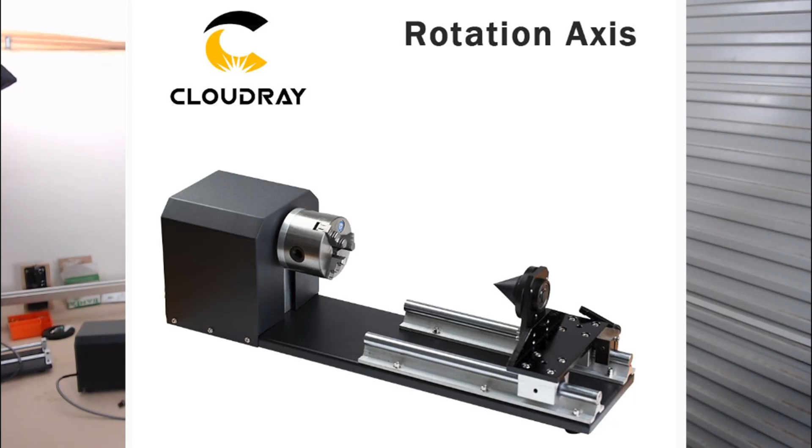We'll look at how to set up the Chuck Rotary Axis in the software, where to find the settings that need to be changed, such as the steps per revolution and the diameter of our workpiece. The circumference is also important because this will be determining the maximum height of our y-axis, so that it doesn't overwrite onto the previous cuts we've done.

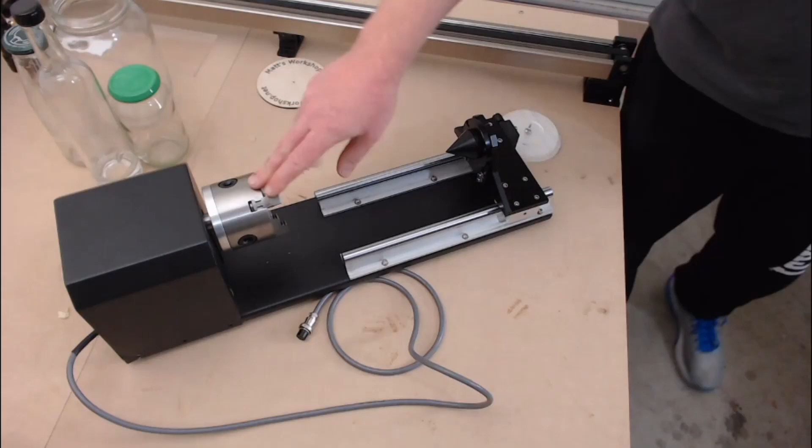So this is the Chuck Rotary Axis. We have jaws that hold the workpiece in place, and the way that you do that is simply put the piece in there and turn with the chuck key until it grips. Now this can be quite damaging on the material and can slip out quite easily.

So I've actually developed a method of holding pieces in place on the Chuck Rotary Axis, and I'll show you how I designed that later on.

So the controller that I'm using for this video with the Chuck Rotary Axis is the Ruida RDC6445. Now Ruida's software that comes with it is RDWorks, so I'll show you how to back up settings and make changes in the software using RDWorks, but I'll also show you how to do it in Lightburn.

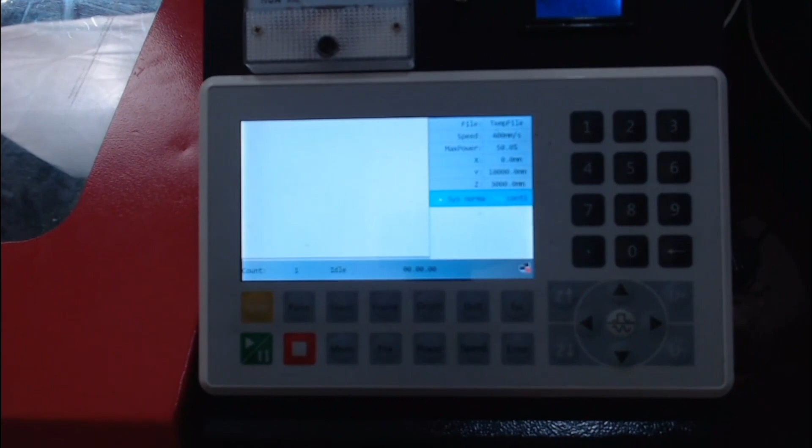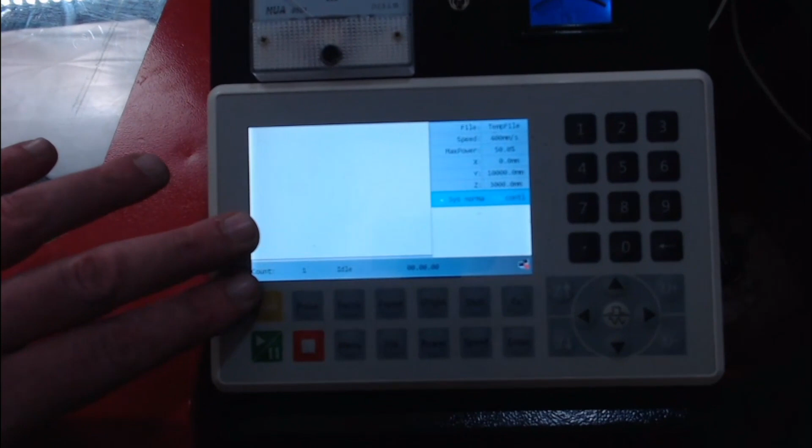If you have a different controller than this, like a Top Wisdom or Trocen controller, the settings that need to be changed are the same. You'll just need to find where they are on your controller and in your software. But if you do have one that is compatible with Lightburn, that makes it quite easy because Lightburn settings will work between several different controllers.

So this is RDWorks. RDWorks is the software that comes with the Ruida controllers, and it's also the software that can talk to the controllers and back up settings.

So before we do any rotary work, it's always a good idea before we change settings to have a backup file. So this is just how to back up the vendor and user settings.

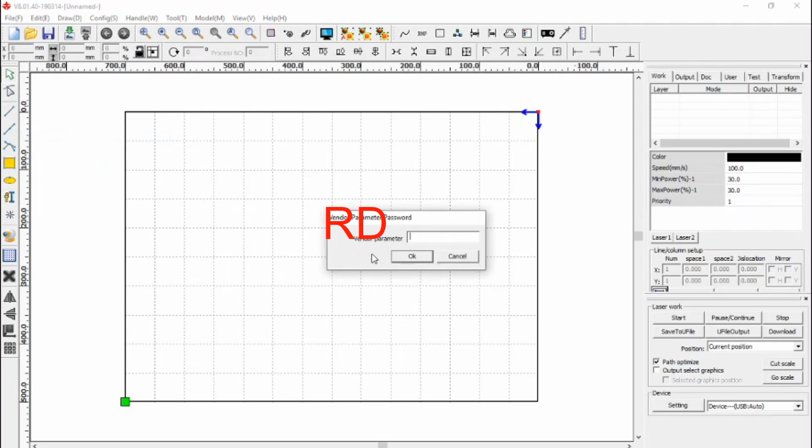So we go to vendor settings, put in the password RD8888, and first of all we read that information from the controller. Now what we want to do is save all the vendor settings as a backup file. I've called my file vendor backup, and we press save.

So that saves everything onto that file, so in case we change something and want to go back to it, we can always open that file and re-import those settings back to the software and then write it back to the controller.

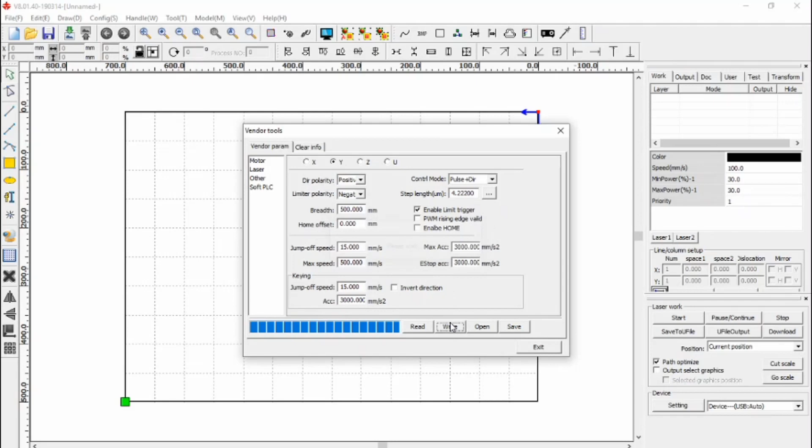Another tip while we're here is looking at the y-axis. In the last video I showed you how to turn off the enable home on reset for the y using the controller. Here in the vendor tools we can untick enable home and write that to the controller, and that does exactly the same thing.

So now that we've set that, the other option is the user settings. We want to back those up as well. So we just need to scroll down the side here. We read the information from the controller and press save. I've called this file user backup, and we'll save that file.

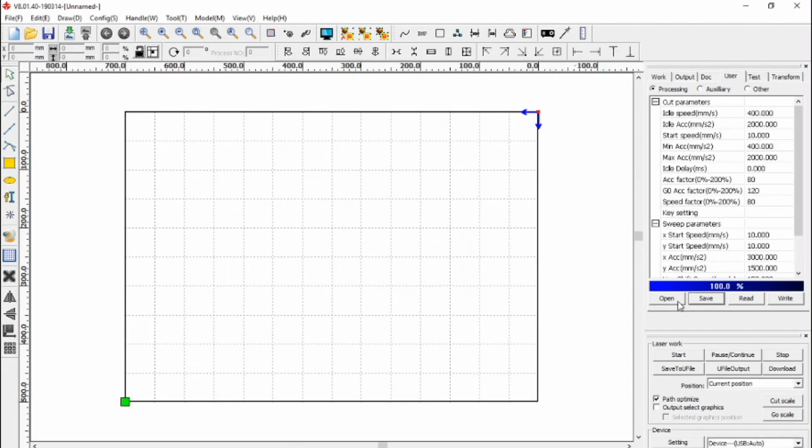So these parameters, if I make changes and forget what they are, I can always open that file and import them again. Okay, so to enable the rotary axis, what we need to do is go to the user tab, other, and scroll down to where it says rotating.

Circle pulse, which is also your steps per rotation, equals the gear ratio multiplied by the diameter ratio, which is then multiplied by the pulses per revolution.

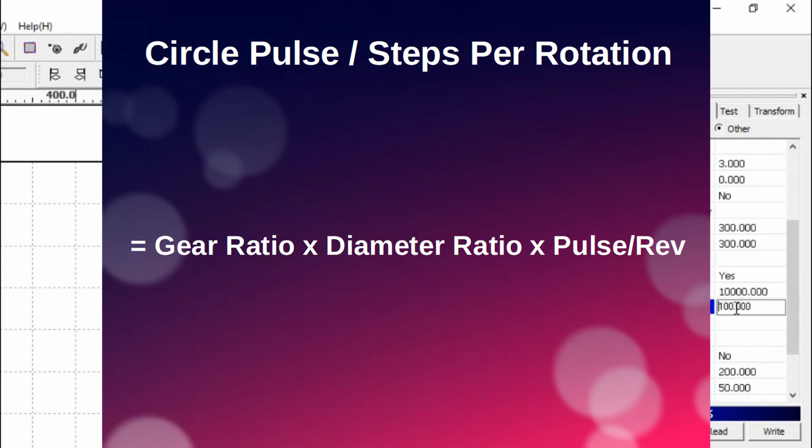So the gear ratio of Cloudray Laser's rotary axis is actually 2:1, and being a Chuck rotary, the diameter ratio is actually 1:1. So we've got a gear ratio of 2, a diameter ratio of 1.

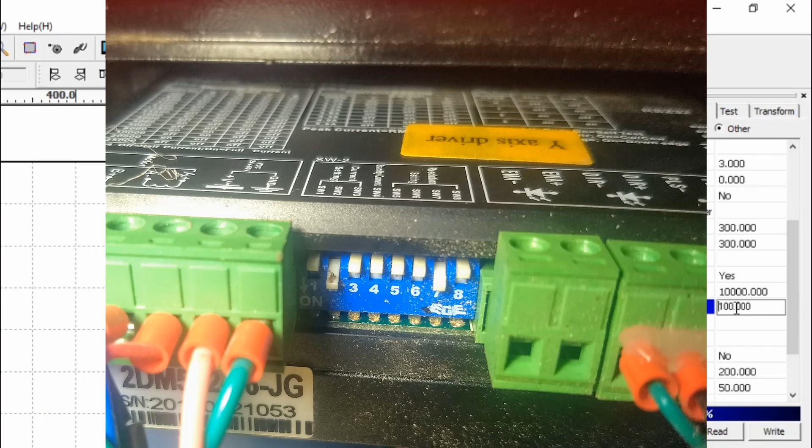We now need to find the pulses per revolution. Now that can be found on the y-axis driver, and we look at the dip switches on the side here, switches 5 to 8. We want to look at the settings of those and then refer that to this chart that's printed on the y-axis driver.

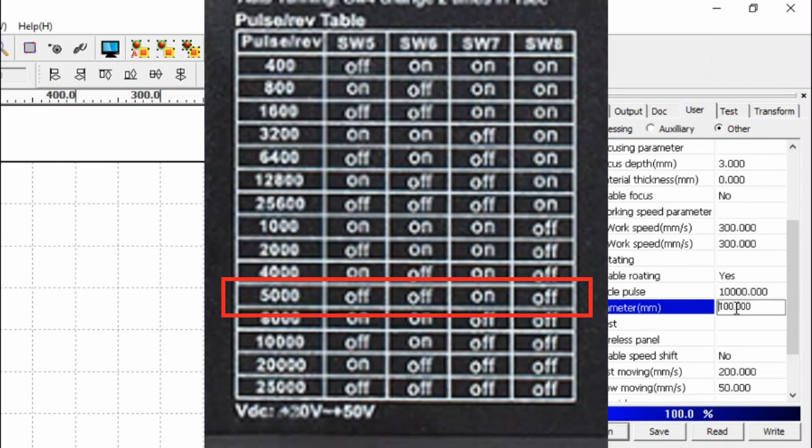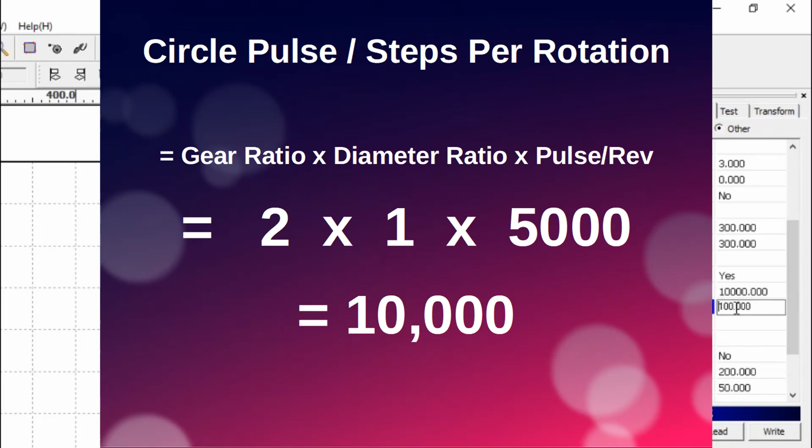If this is not printed on your driver, you should be able to find this chart in your user manual for your axis driver. So we can see here for my driver that it has a pulse revolution of 5,000. Now using these figures we can calculate the equation: 2 times 1 times 5,000 equals 10,000.

That's our circle pulse, or steps per rotation. The only other thing we need here is our diameter, and the diameter will be the diameter of the chuck, which is 80 millimeters. Once you have these figures all entered in, then it's possible now to write that to the board.

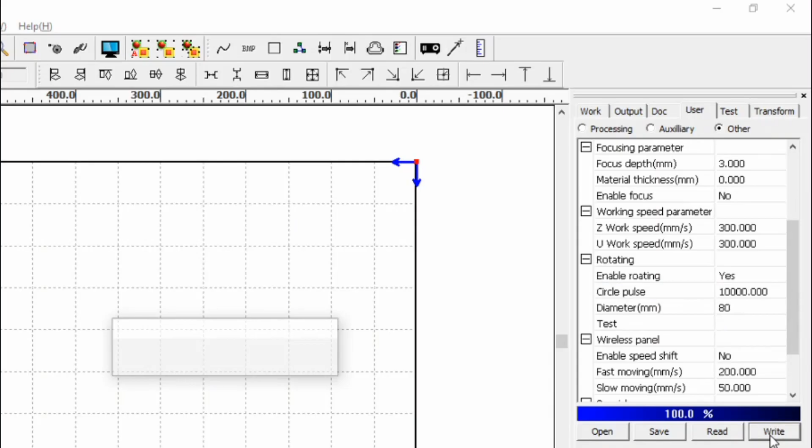So we've checked our diameter, and we have a chuck diameter of 80 millimeters. We've also set our circle pulse, so we're going to do a test. To do this, I'm just going to pop some tape here as a mark, and on the other side we'll pop another piece of tape as the lining up mark.

Now what we want to do is use this option underneath here that says test, and this test will run at 50 millimeters a second. You can change it if you want to. We're going to see whether the 10,000 steps per circle pulse is actually one full revolution. So we press test and say OK, and the rotary will go around and it should line back up perfectly, which it does.

Just as an example, I want to show you here, if we had our steps out, say at 9,000, and we wrote that back to the board and did that same test again, we should see that the mark stops short. That's a way you can see whether you need to adjust it slightly. If it was out by a few millimeters, you could adjust your circle pulse so that it met up to where you want. So we've got it back where it was, and we'll pop it back at 10,000, making sure we write it back to the board and then test.

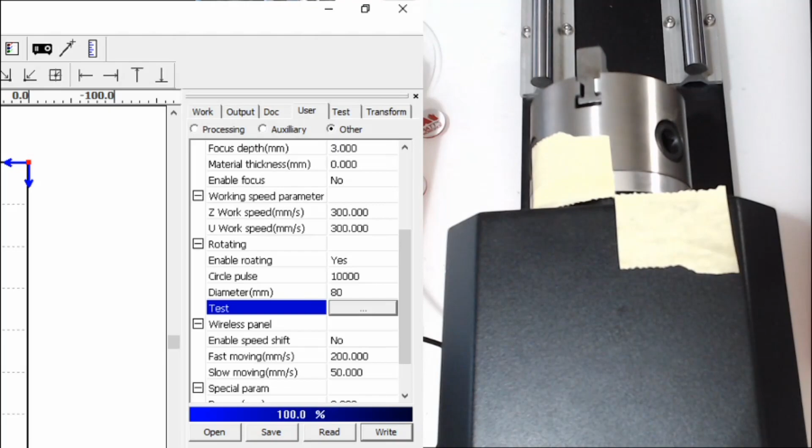Another important setting to change when using a rotary attachment on your laser machine is the idle speed. On the Ruida controllers, the idle speed is the speed the axis moves between cuts, and also the speed at which it returns to its point of origin when the job is completed, or if you finish by pressing stop. If you've got it set at 400, it can cause quite a lot of inertia, and the piece may fly out of the rotary attachment, which you don't want. So when I'm doing rotary work, I like to set this down to about 50 millimeters a second.

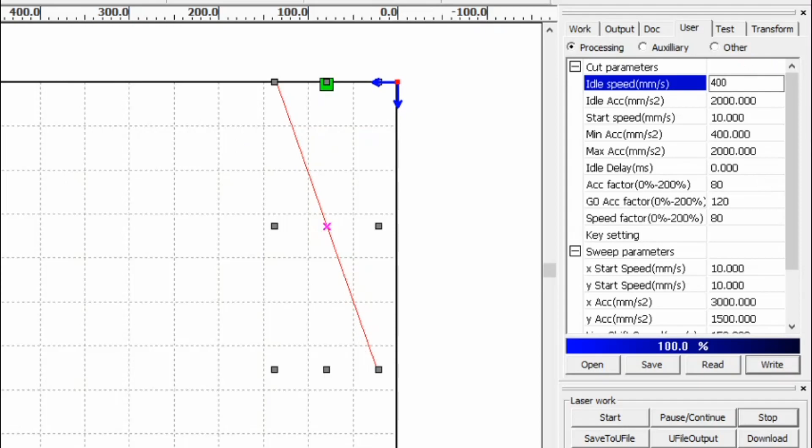I'm going to quickly demonstrate. I've got this line here that's 20 millimeters a second, and I still left my return speed at 400. So using a chuck rotary attachment, if I start the job at 20 millimeters a second, at the end of the job it will return at 400.

So if we reduce this now to say 50 millimeters a second and write that back to the controller board, if we start this job now, you'll notice that if I press stop halfway through the job or at the end of the job, it will return at a more controlled speed.

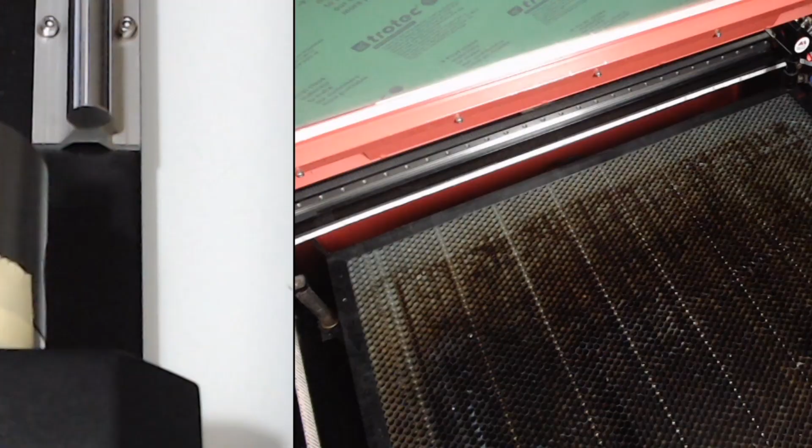Now what we need to do is put the rotary inside the machine. Following the instructions from the previous video on connecting up the aviation plug down here, we've got that all connected, and now we need to lower the bed far enough so that the rotary will fit in.

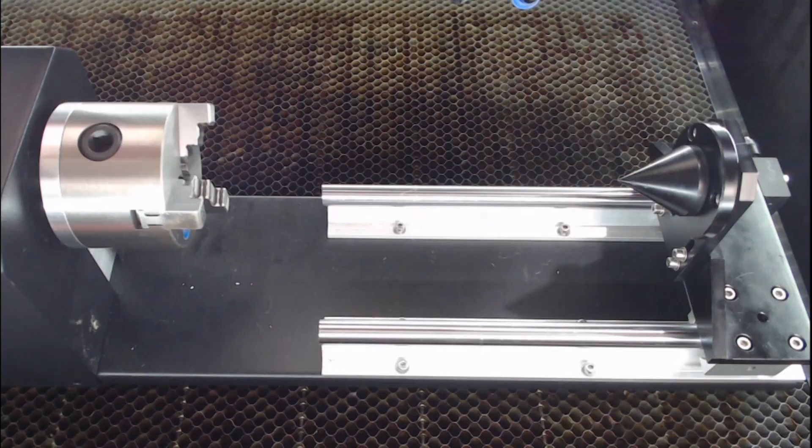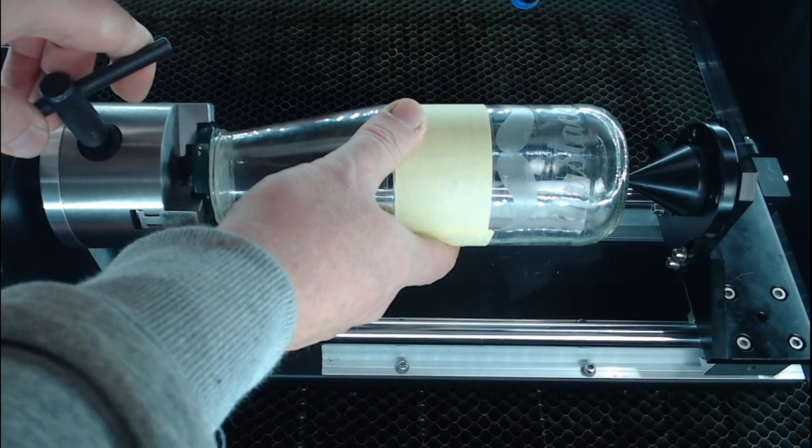Once you've got it positioned, this is now the y-axis, so the y-axis rail is free moving, it's not being held by the stepper drivers. So we can just move it to where we want, and then if we open up the chuck jaws, we can position our piece. There are other methods of positioning and holding material on the chuck. The chuck is quite aggressive on the material, so it can actually cause it to break, mark it, etc. So just move the tailpiece up and lock it into place as well.

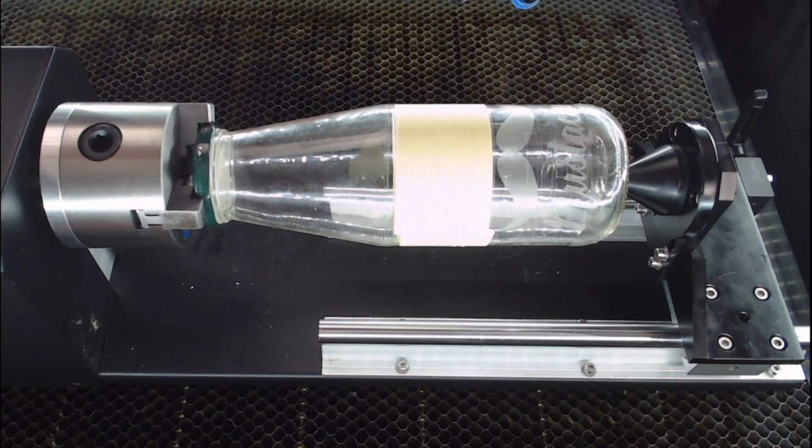Now what we need to do is find our focus point, so we can focus that on the part of the job we want to engrave or cut. So I've focused that there, that's good. Now what we also need to do is find the center line or the center axis.

On this chuck I've marked the center axis, so we can move our x-axis over there and position the rail until it's on that and we know we're centered. Then bring it back to where we want and press origin.

Now when you're working with the rotary, we need to know the diameter of the workpiece, and that gives us the circumference, which works out to our maximum height or length of our job. This is a 77 millimeter diameter bottle, so we're going to have a look at the software.

If our diameter of the bottle is 77 millimeters, then we go to user, down to the diameter, and put in 77 millimeters. Once you work out the circumference for the bottle, then you use this as your maximum height. So the bottle at 77 millimeters has a circumference of 241.9 millimeters. We just put that in there.

I'm actually going to cut this one on the laser. Just remember before you start that you need to write that setting back to the controller board.

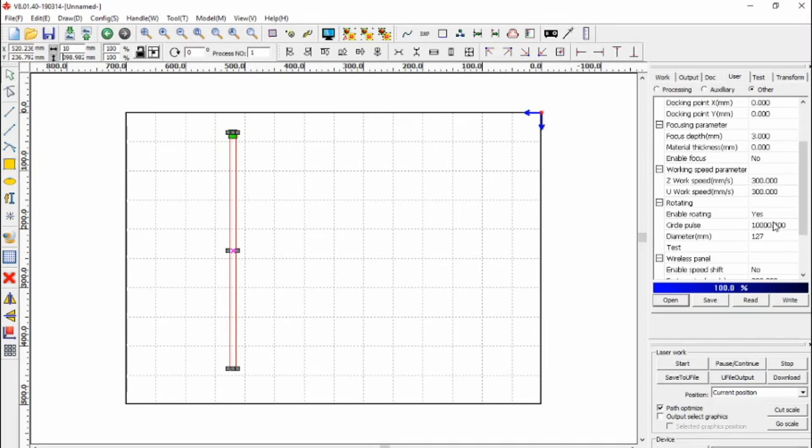So I put that 398 in here just so that we adjust our rectangle. This is the top of the y-axis, the circumference of the jar back to the top again of the y-axis and returning. So let's just run this test and see how accurate we are. But before we do, we need to make sure that we write this 127 millimeters to the control board.

So what I've done for this test is I've just put the tape on the jar and marked it. I'm not actually going to cut this, but we can watch the red dot go round back to that location and then return back again. So I've got the laser off and we're just going to start this now.

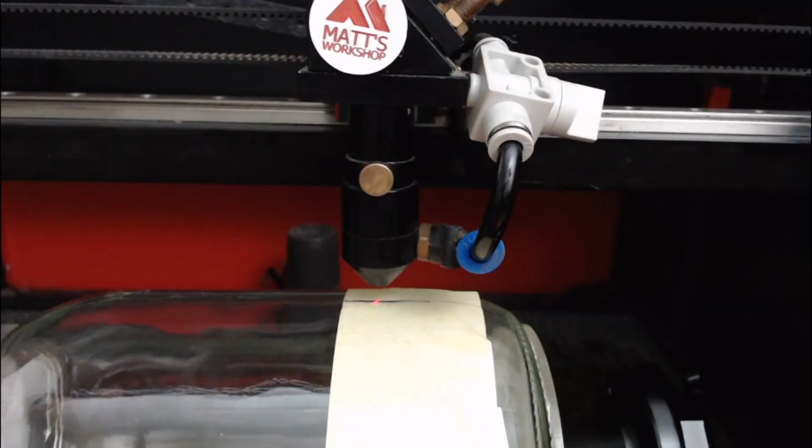So as we can see, we went all the way around the jar back to that point and then around back to the origin again. So we've been able to set it up successfully by entering in the diameter in the settings as well as the circumference as our maximum height.

We're going to have a look now where we can find these settings in Lightburn. First of all, we can have a look at the machine settings. So under Edit, go down to Machine Settings, and this will load the user settings from the machine.

One of the settings we changed previously was the idle speed, which can be changed here, so we could set that to 50 millimeters a second. The other thing we can look at here is Enable Rotary. We can turn it on and set the value in there, which was 10,000. And the diameter for the test piece was 80 millimeters. We can write that to the controller, and when you're finished, click on OK.

The next thing we look at is Tools and Rotary Setup. Now we've enabled the rotary, so it'll come up here as a tick box and you choose what type of rotary attachment you have. In this case we're using the Chuck version, and we have steps per rotation which we've set at 10,000 steps per rotation, and the object diameter of 80.

The good thing with Lightburn is that if we change this to 127 diameter, it automatically calculates our circumference for us. So if we had a piece that was 127 in diameter, we know that our maximum height will be 398 millimeters. And now we click on OK.

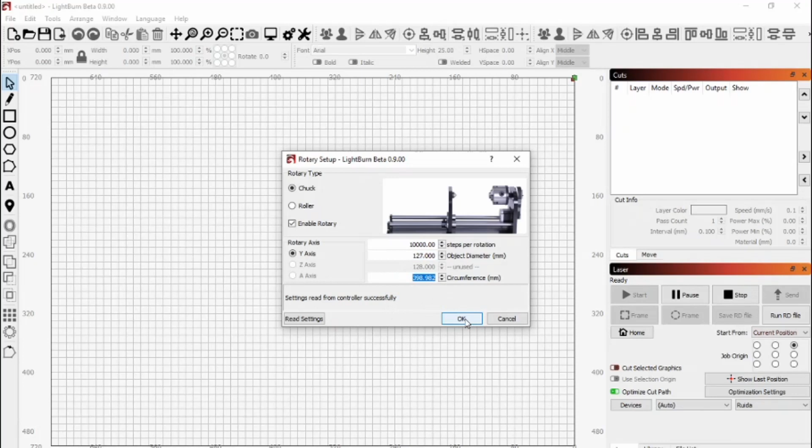There is another option which you can turn on down here, and that's Enable Rotary option, where you can turn it on and off. Where you get that is in the settings, and we go to here where it says Rotary Enable on main window. When we click on OK, we'll see that we have this switch box here which we can turn on and off for the rotary attachment.

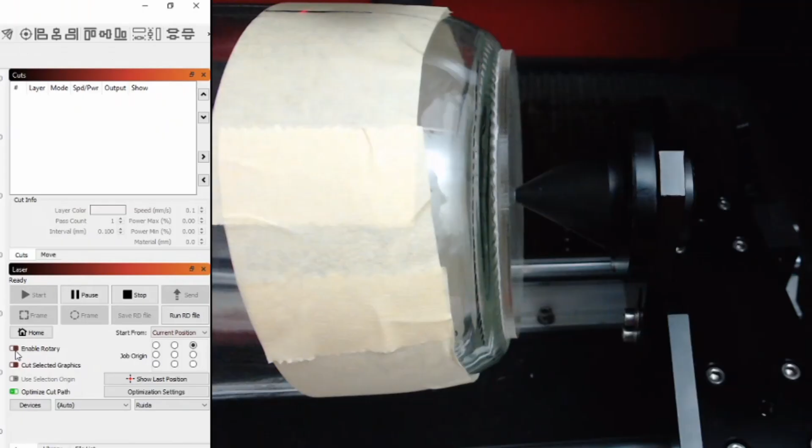The thing I notice is that the Chuck rotary attachment has this cone or point that points into the bottom part of the workpiece. So the cone is not very accurate at holding the workpiece. You can put a mark on your job to get the absolute center, but on very hard objects it doesn't pierce and doesn't hold it very securely. On the other end we have the Chuck, and it has teeth, so if they put pressure on glass, you could crack it.

So I've developed this little holder which has a soft padding on the inside to help it hold together and has got a lot of friction there.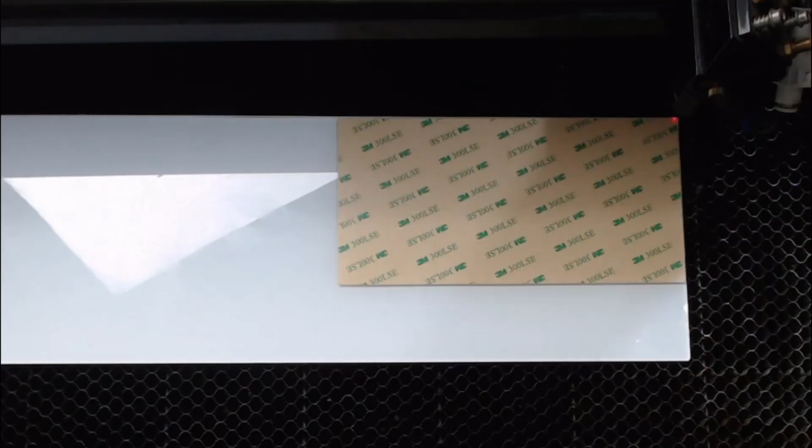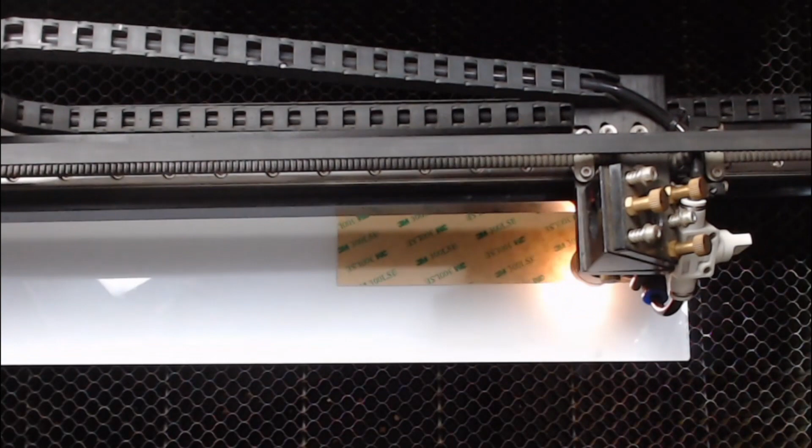The first thing I did was draw up some circles in Lightburn. These are 100 millimeters in diameter with a 4.75 millimeter internal hole. These will form the face and the base plate for my rotary holder, cut out of 3 millimeter acrylic with some 3M adhesive put on it. The next part we need is a 50 millimeter disc with a 10 millimeter internal hole, cut from the same material.

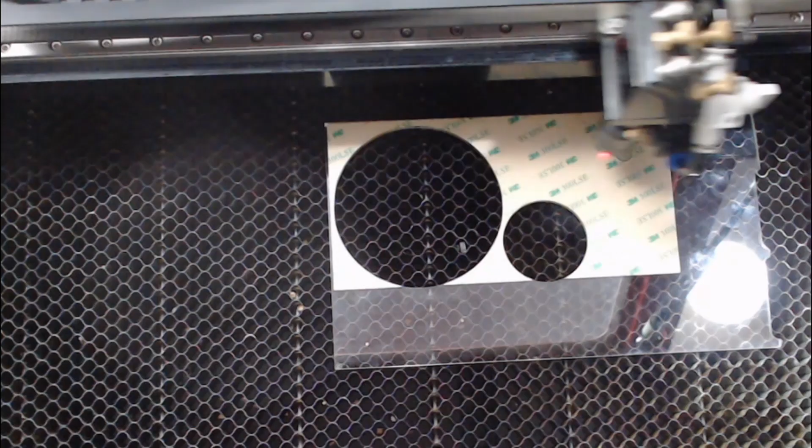So get this packing type material, and peel off the 3M adhesive. We want to stretch it out as far as we can, push down, do this for both pieces, and then trim the excess off. You can use this foam, or you can use rubber, anything that's got a bit of friction and grip to it. Now this is the other piece that we cut out.

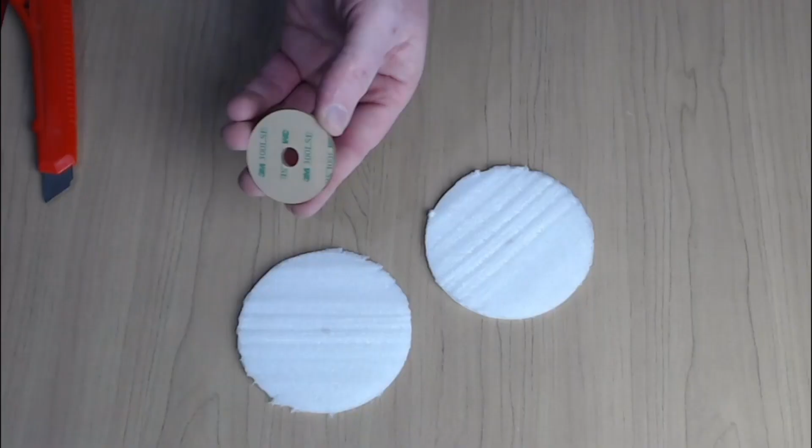This piece here is what ends up being held in by the chuck. You can make this out of a thicker material if you want to. So grab a screw, poke it through. Now it's a tight fit, designed that way so it doesn't slip.

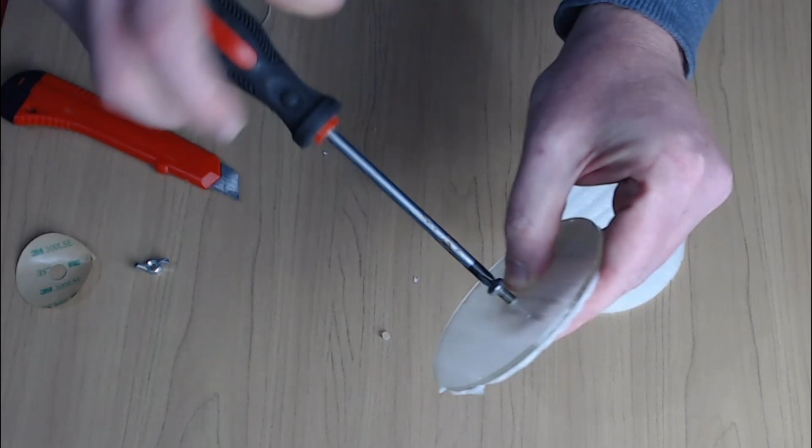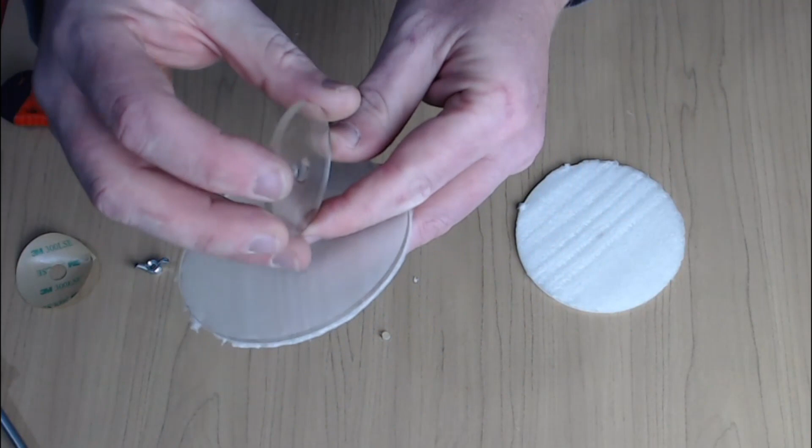You just adjust your center hole to the size screw you're using, and the other piece we cut out before with the adhesive backing goes around the outside edge of that screw. Again, a nice central fit so that we know it's all dead center.

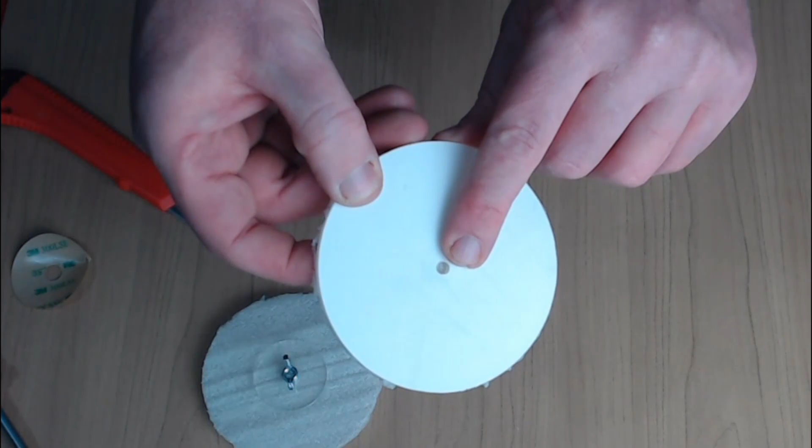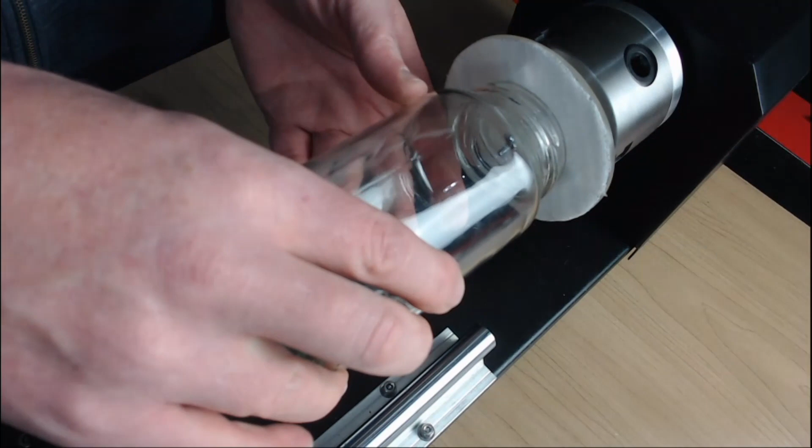So let's go and assemble it up. I've got a jar here which I measured up to that piece, so it fits nicely on that edge, and this piece gets wedged into or held in place by the chuck. So tighten the chuck down. The wing nut ends up on the inside of our workpiece, and then we pop this on here. The backing plate goes at the back.

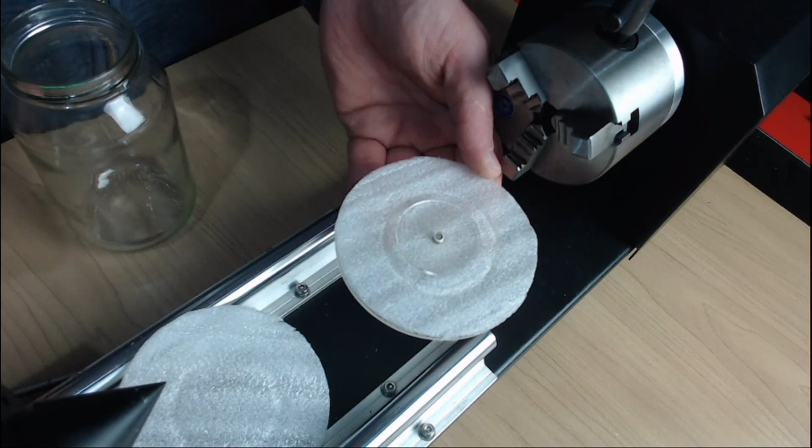Line it up with the center hole, and then lock it in place. And now we have it nice and secure inside between those two friction pads. The good thing about these is that if you didn't want the big one on there, you wanted a smaller one, any size, you just cut one to suit the piece of material or the circumference of the inside of the work that you want. That's my design for that one.

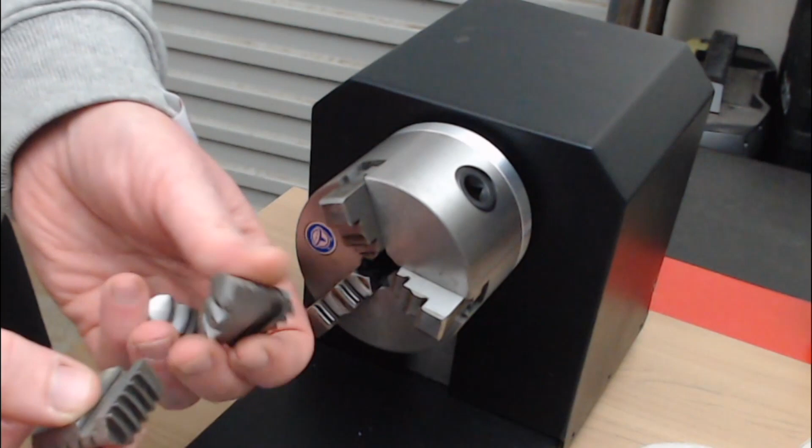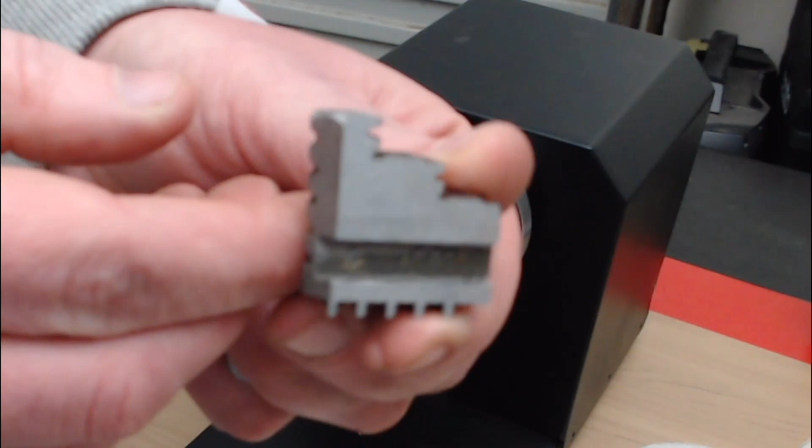Okay, so the last thing I want to show you is the teeth that go in the chuck. If you have a look at the set of teeth, these ones clamp inwards and these ones go the other way and will clamp outwards. They're all numbered. If you look on the inside, you'll see it's got some numbers on there, and this one has a number 2 at the beginning. We have a number 1, so 1, 2, and this will be number 3. These are specifically geared for the inside of the chuck.

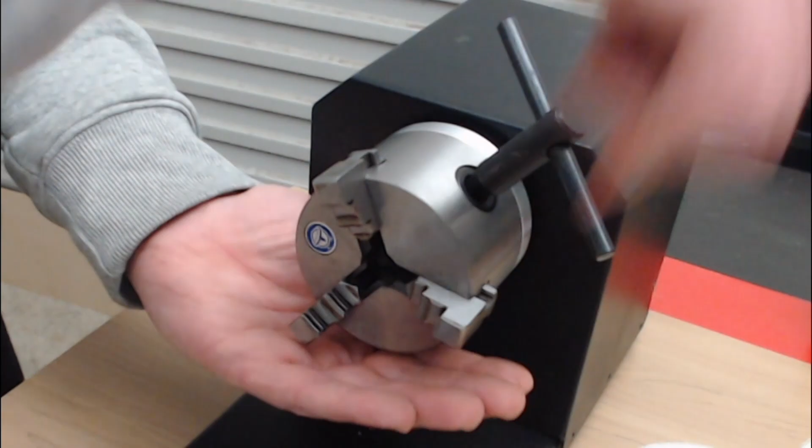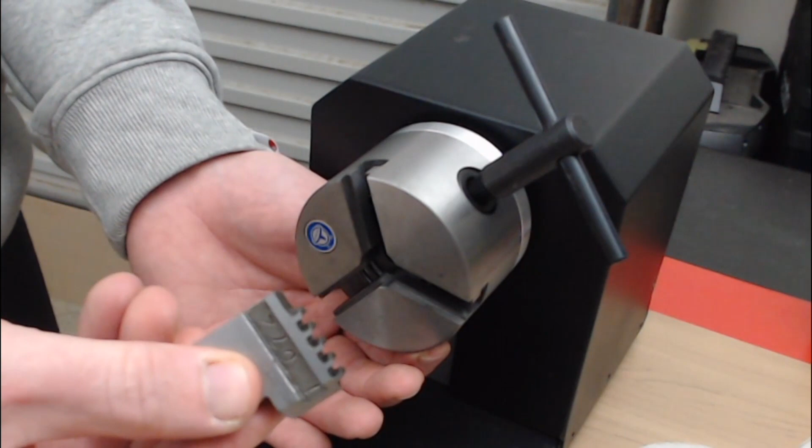So to remove the other ones, we just rotate them outwards. Pull the first one out, and it's a number 2, and this one here is number 3, and number 1 will be the last one that is released. Now number 1 needs to be the first one that goes in, so this is number 1. If we turn the chuck around so that's up at the top so we can see it, I'm going to zoom the camera in and we're going to have a look at that.

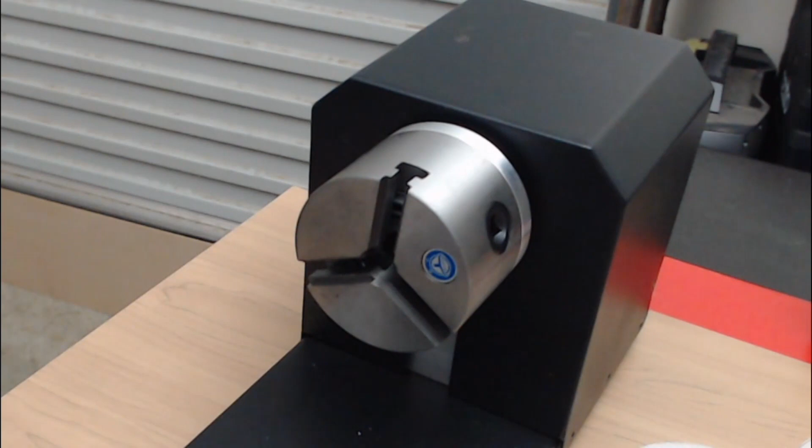So we can see we have a number 1, a 3, and a 2. That's the order they need to be assembled.

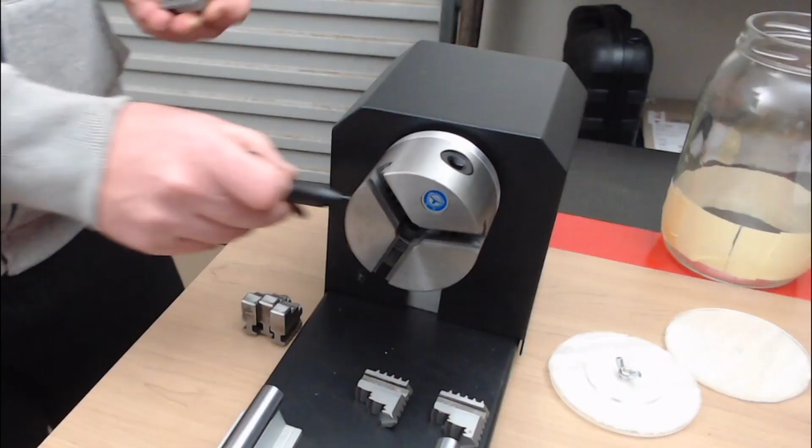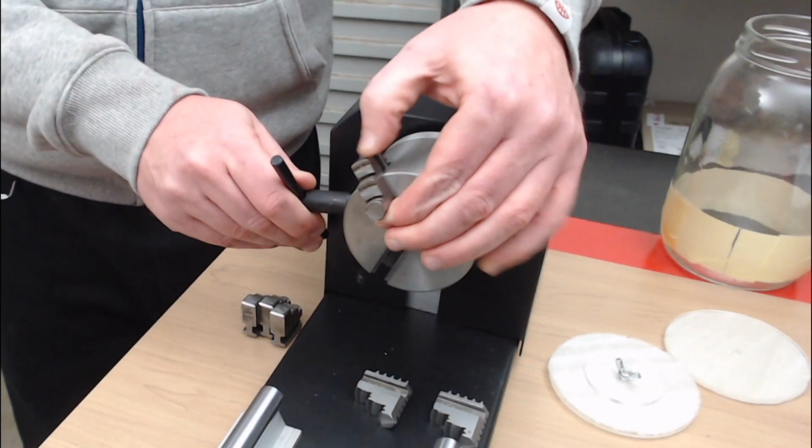Number 1 needs to go in first. So to put them back in, we grab number 1 and slide it into the number 1 slot, and turn it clockwise just enough for it to grab and so it can't be pulled out. You don't want to turn it too far or they won't be synchronized.

Now we rotate it for number 2 and do the same thing: pop it in and rotate it clockwise just until you can't pull it out. Then we do the last one, number 3 - slide it in, turn it clockwise, and now you should be able to continue turning.

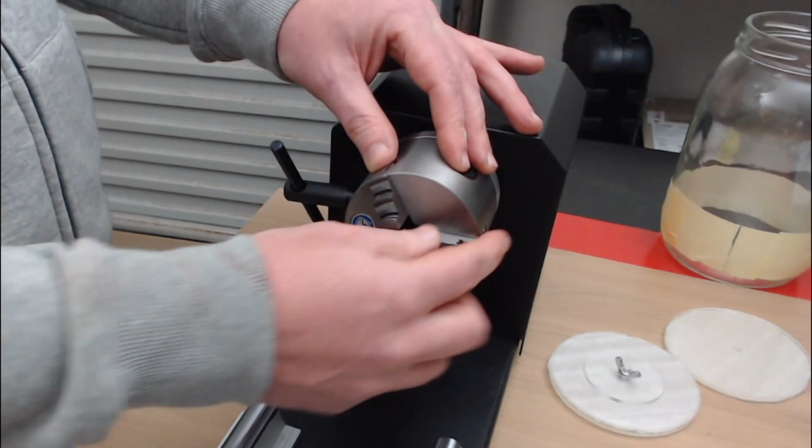You'll know you've got it synchronized and all correct when they reach the edge of the circumference of the chuck - they'll all be flush. If you haven't got them in correctly, they won't be synchronized, so they'll be stepped out and jagged, and they won't be able to grip properly.

So you've got the outward gripping teeth and the inward gripping teeth - just remove them the same way.

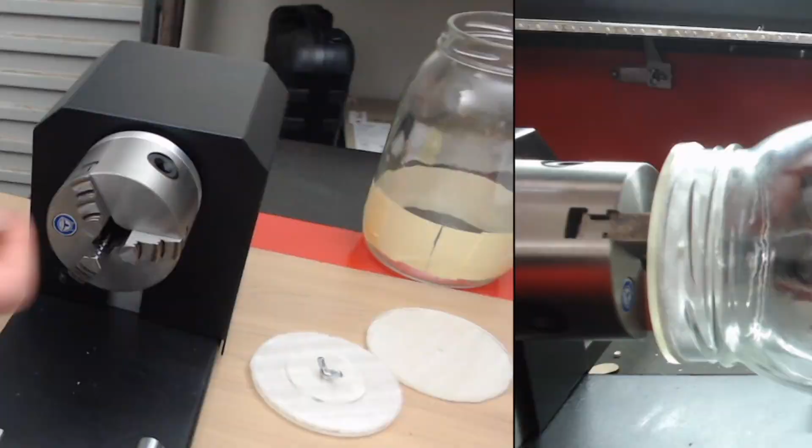Alright, let's do one quick project from start to finish. We've got this jar we've been working with, 127mm diameter, and we're going to set up a job in Lightburn to do this. I want to etch this onto a jar for a chocolate stash.

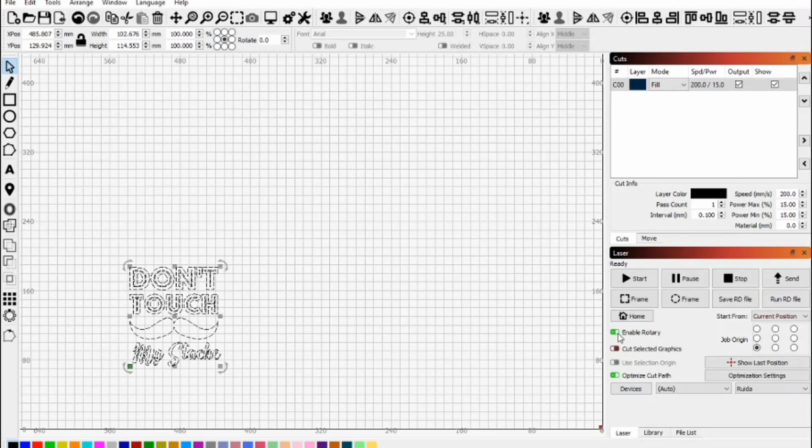So what I'm going to do is set it up. We enable rotary, then go into Tools, Rotary Setup, select Chuck, and put in the diameter of 127. We jump down here, grab the circumference, and put that into a frame that gives us an idea of what the height of the workpiece is going to be.

So we're putting in the circumference - that's now the height, which is our work area. We only want the work length to be approximately 120mm, so we're changing the width to 120mm. That gives us the circumference.

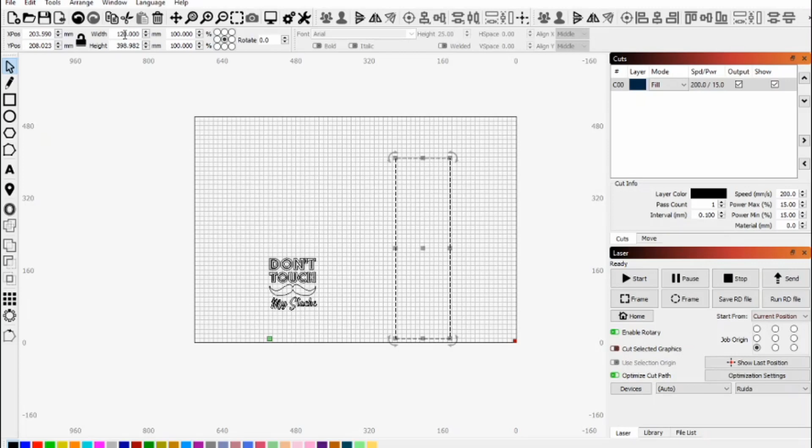So what we're going to do is rotate this one - we'll take it round about 90 degrees the other way, and pop that in on our jar. We're going to put it down the bottom here.

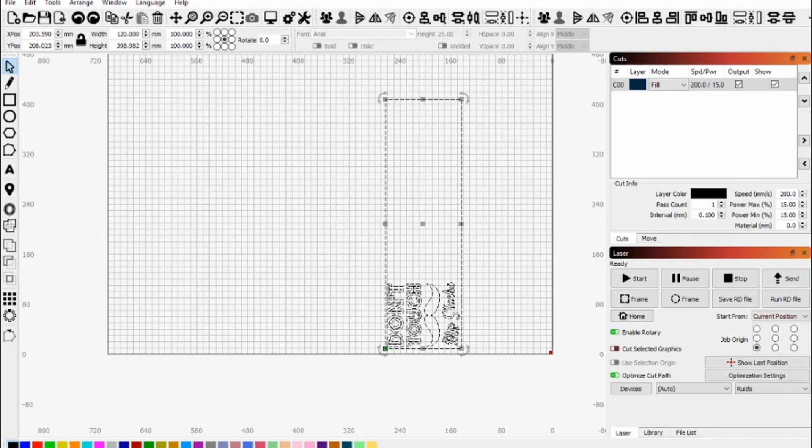Now I've already set up my origins, machine origin and job origin, so the rotation's in the correct order for my machine. We'll just pop that there, and it gives us an idea that it will fit in - we know it's going to fit in the width of the x-axis, and it's going to take up only a portion of the y-axis, which is what we want.

So we can remove the outside rectangle - we don't need that, and we don't want it to cut. We just need to make sure it was going to fit in the space required. Now we've set the job, I'm going to run this now on the machine.

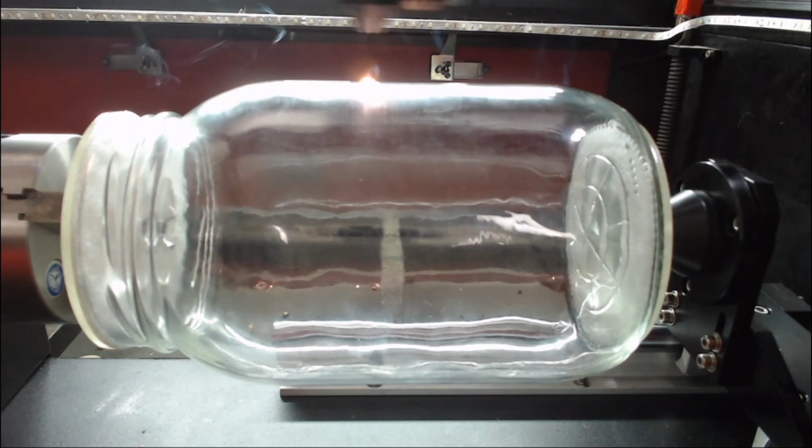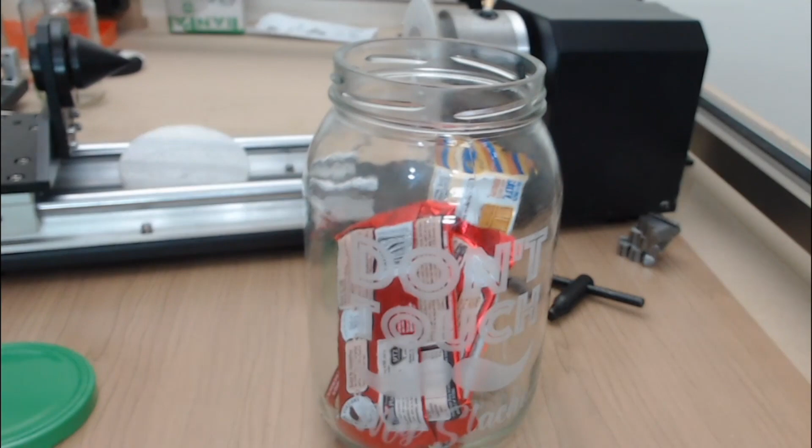So here we have the finished product: 'Don't touch my stash' - that's specifically a notice for the kids and the wife to leave my stash of goodies alone.